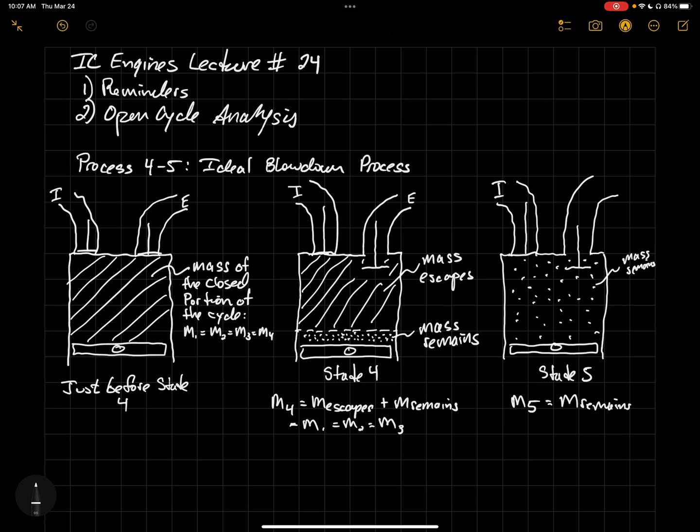So all of these irreversibilities essentially cause entropy generation, and we're doing an ideal cycle analysis, and we know that entropy generation is not an ideal thing, right? We don't want to generate entropy; that is an indication of inefficiency within the process. And so we define this as an ideal blowdown process, but we also recognize that there's a tremendous amount of entropy being generated during this blowdown process by virtue of the mass that's escaping being initially at a high pressure. It's at the pressure of state 4, and then it lowers its pressure to, say, atmospheric pressure, right?

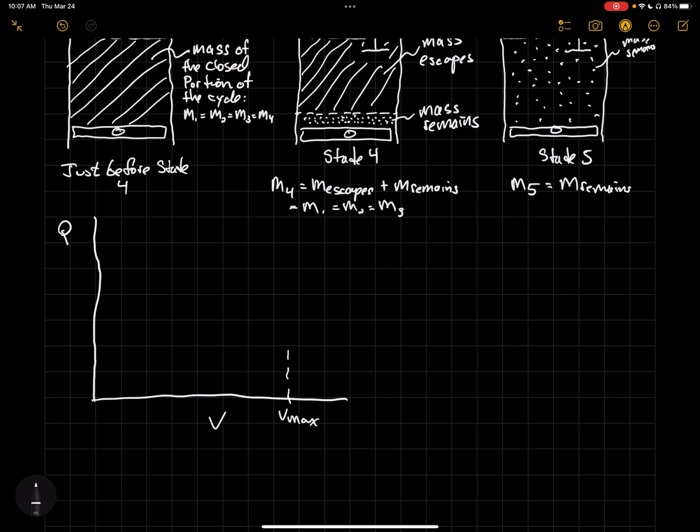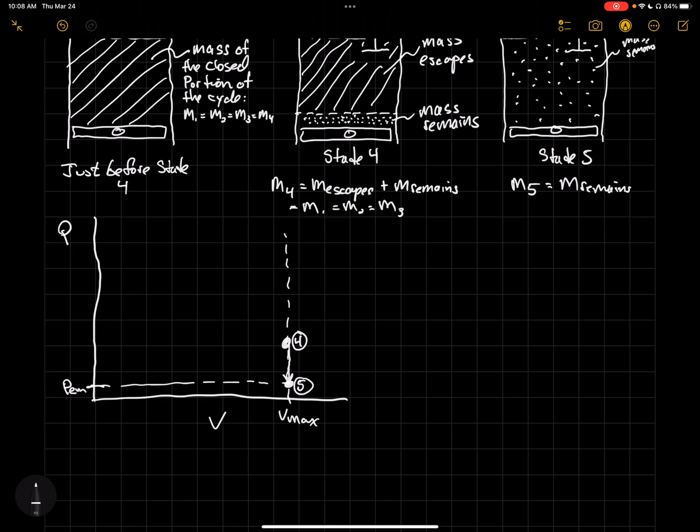So just to highlight that, we can draw on our PV diagram. We're basically here at that maximum volume. Piston is at bottom dead center, and our system is at state 4, which is at some elevated pressure P4, and we're essentially blowing down by allowing the mass to escape the cylinder to some exhaust pressure, some pressure of the exhaust manifold. And so that pressure drop from state 4 to state 5 occurs because mass is escaping the cylinder. So you have less mass in the cylinder, same volume.

And so consequently, the pressure lowers as the mass that remains fills that expanded volume. So the question is, if the mass that escapes is essentially a throttling process, we go from high pressure to low pressure without extracting any useful work out of it, right? That's an irreversibility. Then how can we model the blowdown process to be ideal? Well, this is where we have to recognize that our system is open, and we're no longer doing what is called a control mass analysis, but we now switch to doing a control volume analysis, okay?

So what do I mean by that? Well, just before state 4, if you look at the figure on the left, this mass that's in the cylinder is a combination of the mass that will eventually escape and the mass that remains. And it's the same mass that we had at state 3, at state 4, at state 2, as was at state 1. In other words, there was a series of processes where the mass didn't change because it was a closed system. And if you remember way back when we first talked about thermodynamic systems, we said that if we have a closed system, we can treat the mass of that system as our control mass. In other words, that is the mass that we're doing the analysis on, okay?

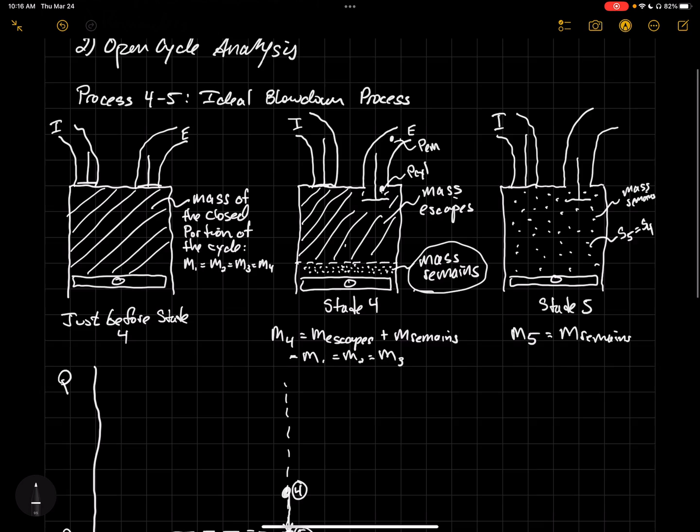But of course, as that mass is escaping, just to beat a dead horse, the mass that escapes has a higher entropy because it's generated entropy as it's undergone this throttling process, this unrestrained expansion past the exhaust valve, okay? So what that means, looking at our PV diagram, is that at state 4 we have an entropy at state 4. And then finally at state 5, we also have an entropy at state 5, and this is equal to the entropy at state 4, okay?

And so essentially, if we draw this on, say, a TS diagram, then our TS diagram would more or less look something as follows, where we have our state 1, where we have relatively low temperature, low entropy. Oops, this is entropy, excuse me. Let me correct my subscripts here. So this is a TS diagram.

We have state 1, and of course, process 1 to 2 is an isentropic process where we increase our temperature during compression, but we do so isentropically, so the entropy stays constant. We then have some type of heat addition process, and so our entropy increases as a result of that heat addition process, and our temperature also increases, and so this brings us to state 3. And then we have our isentropic expansion process where we have work extraction, and during that work extraction, we also lower the temperature, and we do so isentropically, so the entropy at state 4 is the same as the entropy at state 3.

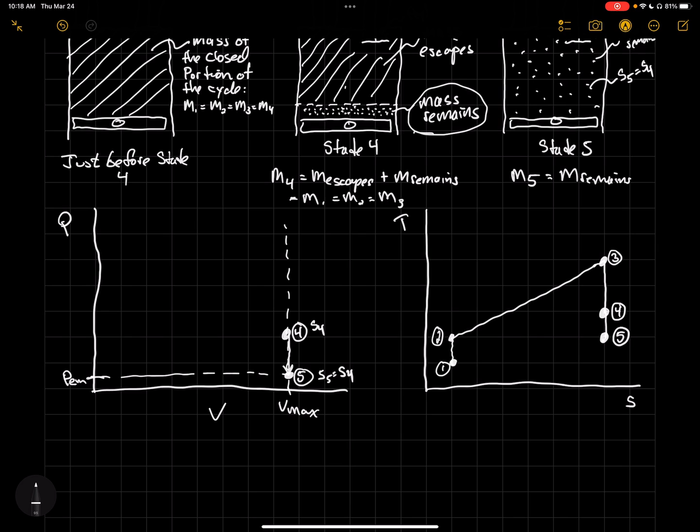And then finally, we have our isentropic blowdown process where we now have the entropy at state 5 to be the same as the entropy at state 4, okay? So this process 4 to 5, this ideal blowdown process, is essentially an isentropic expansion process, a continuation of the expansion process of the mass that remains, okay?

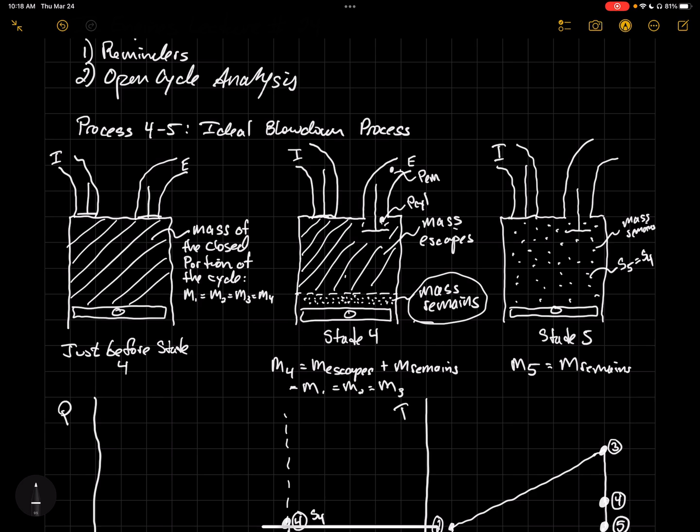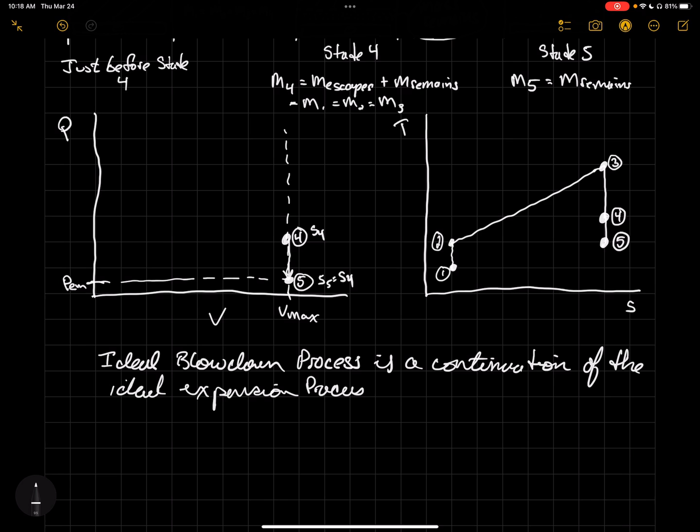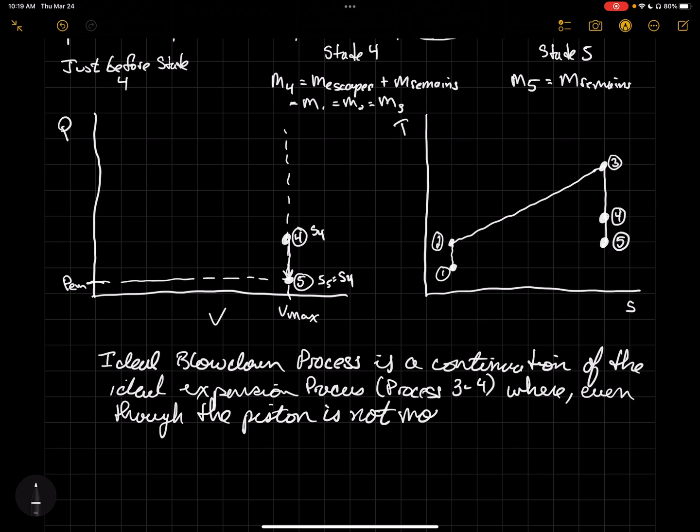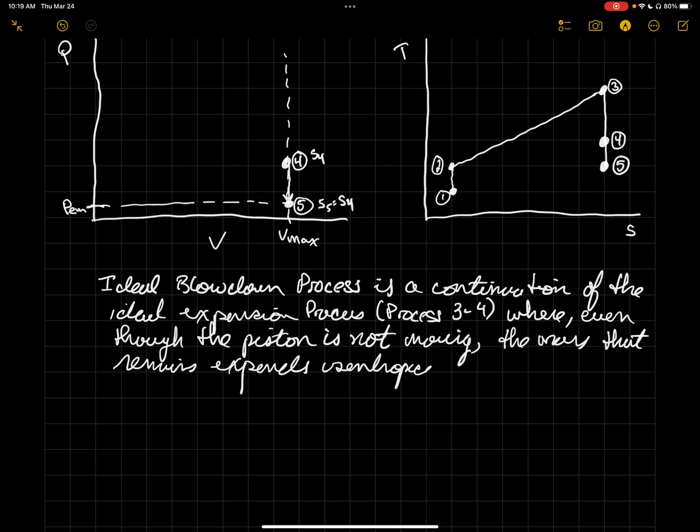So let me just go ahead and say that. The ideal blowdown process is a continuation of the ideal expansion process that is process 3 to 4, where even though the piston is not moving, the mass that remains expands isentropically to fill the whole cylinder volume as the mass that escapes leaves the cylinder. Okay?

So very often we fix state 5 by saying that the pressure at state 5 is the same as the pressure of the exhaust manifold, and the entropy at state 5 is the same as the entropy at state 4, okay?

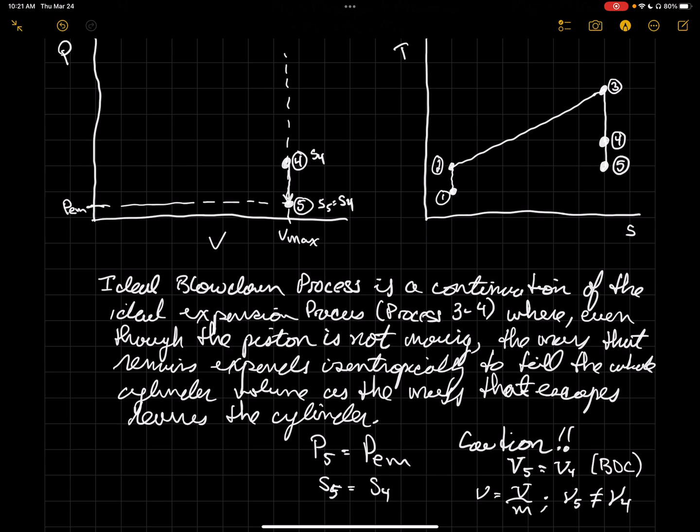Now, one thing I want to caution you on, and this is a common mistake, is that the total volume at state 5 is the same as the total volume at state 4, right? In other words, the piston is at bottom dead center. We're at maximum volume. But if you recall, specific volume, which is the total volume divided by the mass, is not the same at state 5 as it is at state 4. Okay, so specific volume at state 5 is not equal to the specific volume at state 4, precisely because the mass at state 5 is not equal to the mass at state 4, right?

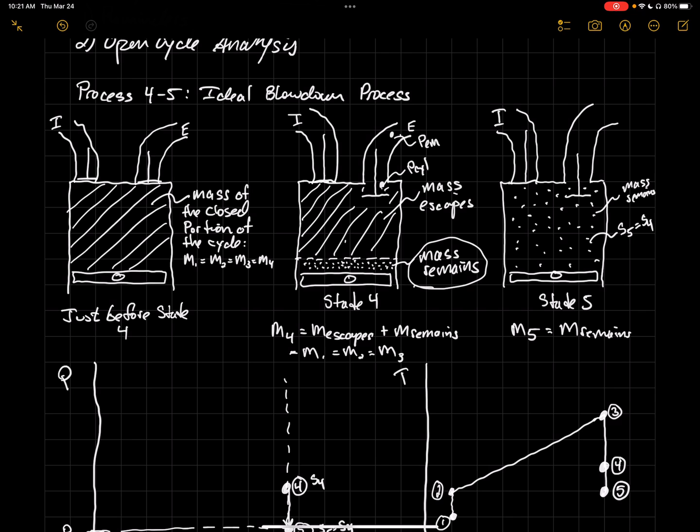If we go back up here and look, we can see that the mass at state 4 is the same as the mass of the closed portion of the cycle. It's a combination of the mass that escapes plus the mass that remains, whereas the mass at state 5 is just the mass that remains, okay? And so we do just need to be careful about that, recognizing that the specific volume at 5 is not the same as the specific volume at state 4.

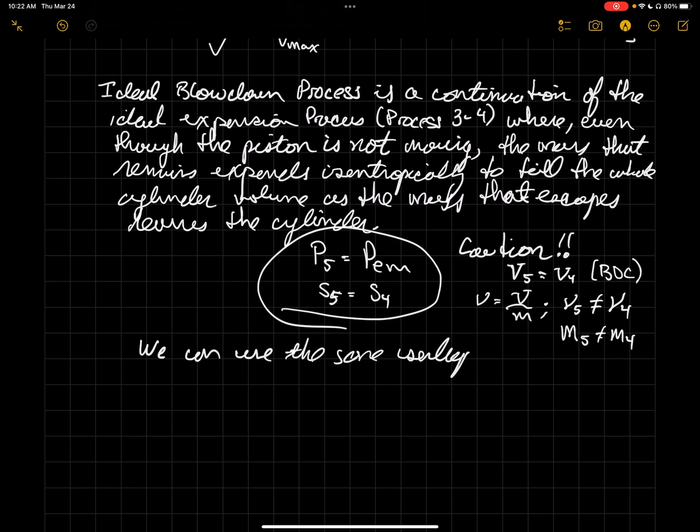Okay, but because this is an isentropic process, we can use the same isentropic relationships that we developed for process 1 to 2, the isentropic compression process, and process 3 to 4, the isentropic expansion process, right? And so we can use the same isentropic relationships for process 4 to 5 that we use for other isentropic relationships.

So we can say, for example, that T2 over T1 is equal to V1, excuse me, just fix that real quick. There we go. I need to fix the whole thing.

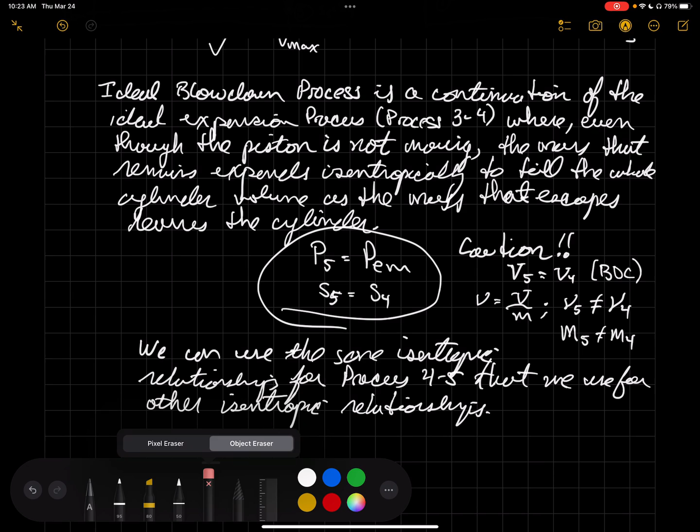So we can say T5 over T4 is the same as V4 over V5 raised to the gamma minus 1.

And we can say P5 over P4 is equal to V4 over V5 raised to the gamma minus 1, raised to the gamma.

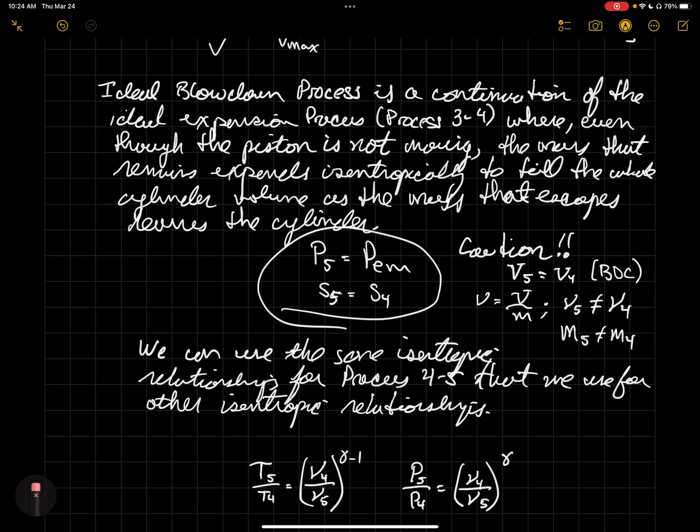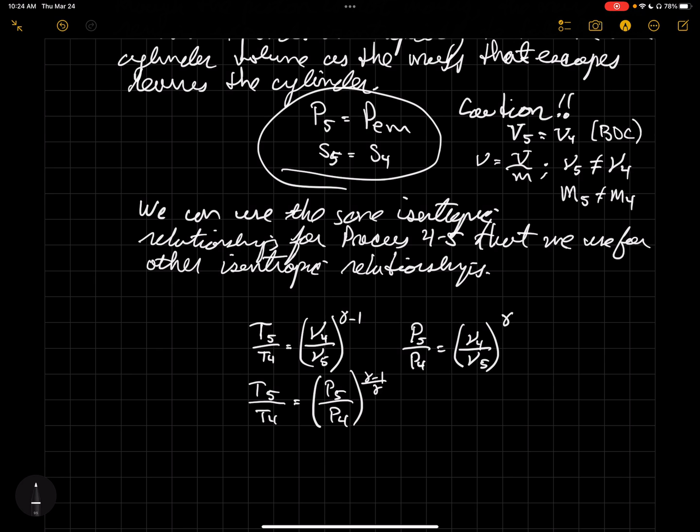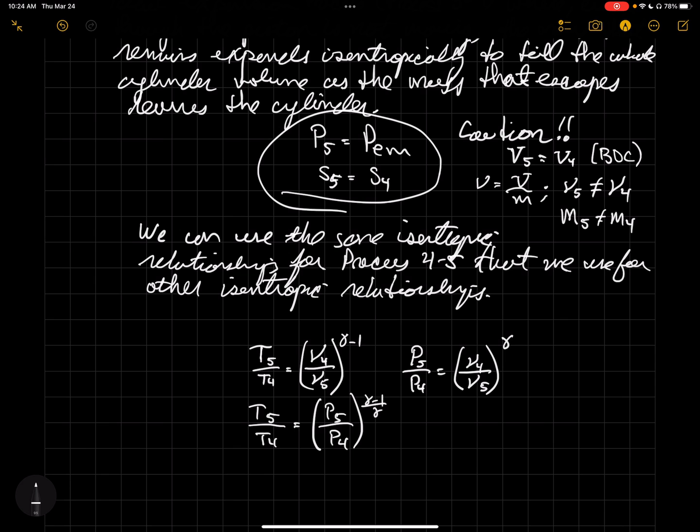And then finally, we can say T5 over T4 is equal to P5 over P4 raised to the gamma minus 1 all over gamma, okay? So these relationships are of course true for any ideal gas undergoing an isentropic relationship where we assume that the ratio of specific heats are remaining constant during that process.

Real quick, just as a quick aside, before we move on and analyze our next process, process 5 to 6, there have been some questions about the relationship between a polytropic process and an isentropic process, right? So just as a quick sidebar, just recall that an isentropic process

of an ideal gas, under assuming constant specific heats, that is, gamma is constant during the process.

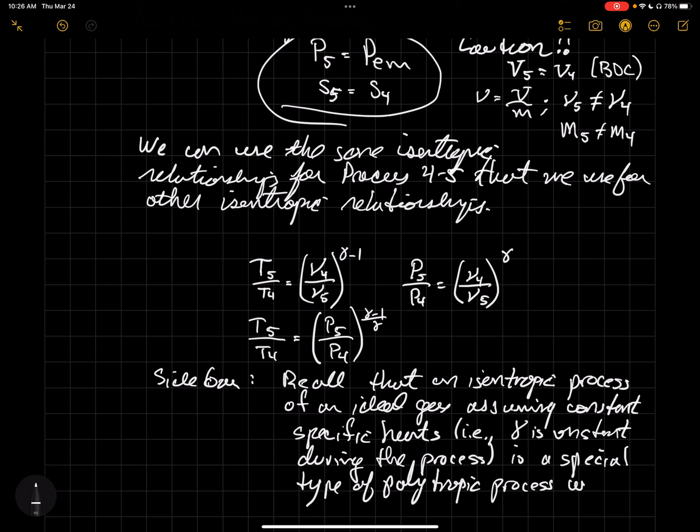So this isentropic process of an ideal gas, assuming constant specific heats, is a special type of polytropic process where N is equal to gamma, okay?

So remember that a polytropic process is PV to the N equals a constant, which is to say P1 V1 to the N equals P2 V2 to the N.

And so if we just manipulate this to say P2 over P1 is equal to V1 over V2 raised to the N, well, that's exactly what we have written up here, right? P5 over P4, it'd be, say P2 over P1 is equal to V4 over V5 or V1 over V2 raised to gamma, right? It's the same, it's of the same form, right?

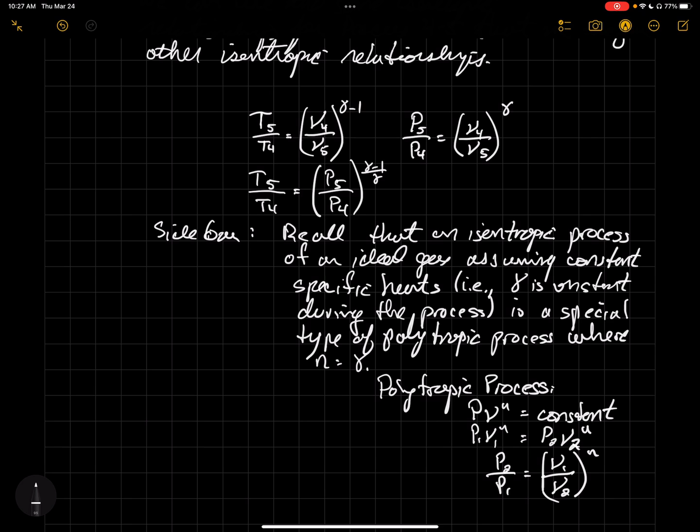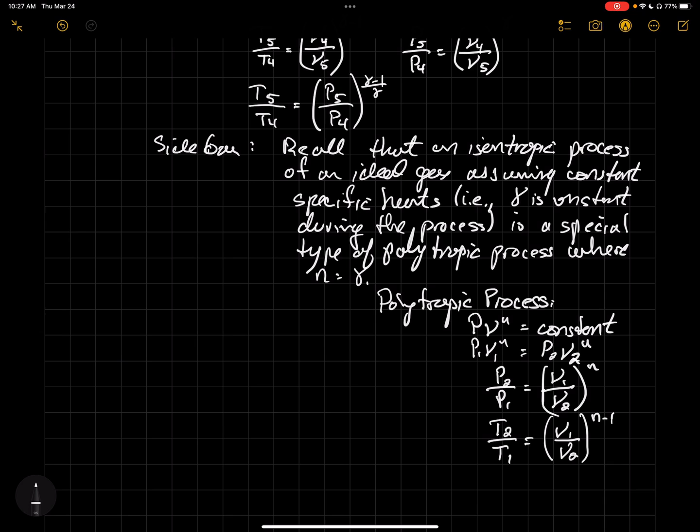So these other relationships that you see here, T5 over T4 equals V4 over V5 to the gamma minus 1, well, you can use those same relationships if it's a non-isentropic polytropic process, right? So in other words, we can likewise say T2 over T1 is equal to V1 over V2 raised to the N minus 1. That's a true statement for a polytropic process of an ideal gas.

And likewise, T2 over T1 is equal to P2 over P1 raised to the N minus 1 all over N, okay?

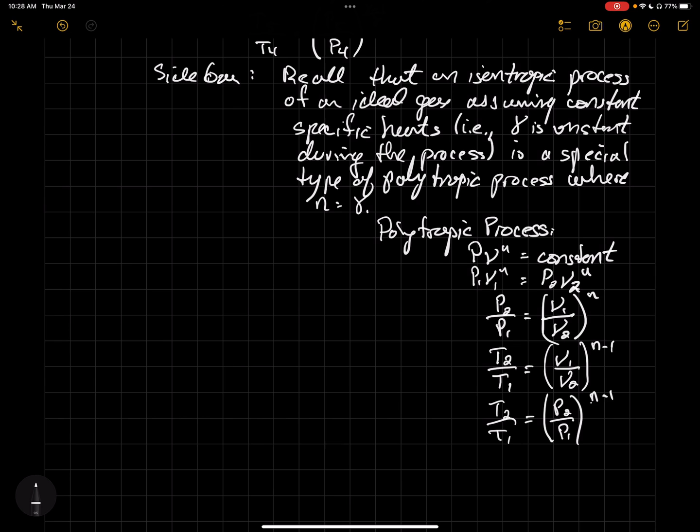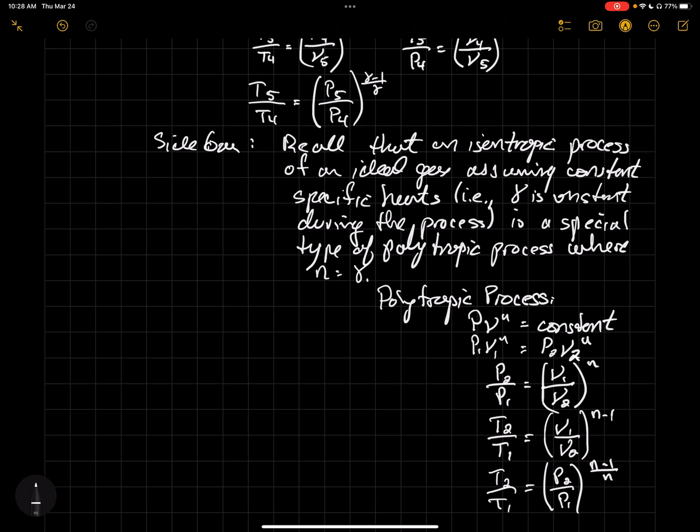Okay, so I didn't explicitly highlight this. For those of you that watched the thermodynamics review lecture, I didn't explicitly highlight this in that review because this is only true for an ideal gas, okay? And I didn't want to make such a bold statement in the thermodynamics review in case it were to get used for a non-ideal gas situation, okay?

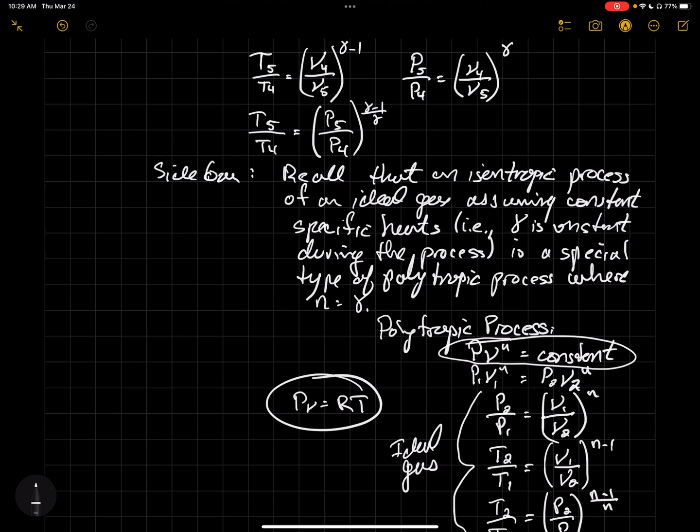But because this is an ideal gas and the ideal gas relationship of PV equals RT, right? It's this relationship that's causing these other relationships in terms of T with respect to volume and T with respect to pressure. The fundamental definition of the polytropic process is this one here, PV to the N is equal to a constant. Every polytropic process is defined as PV to the N equals a constant. But the moment that you allow your substance to be an ideal gas, now you can make these relationships between temperature and volume and temperature and pressure, okay? And that's where the ideal gas behavior comes in.

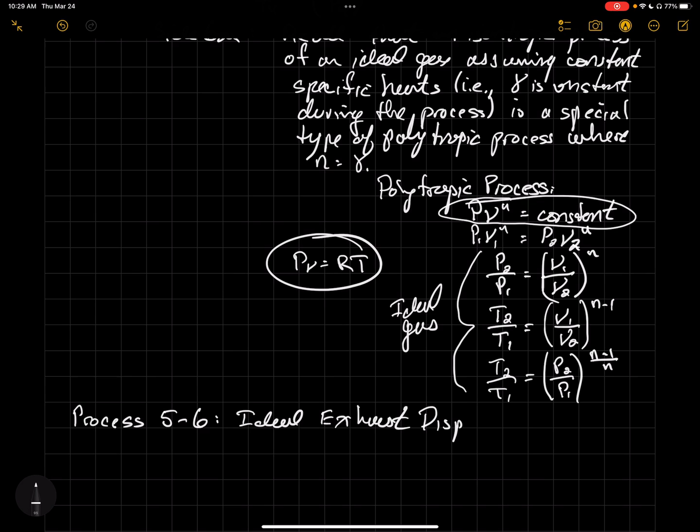Okay, so let's move on then, and now move on to the next process, which is process 5 to 6. And so process 5 to 6, if you remember, is our ideal exhaust displacement process. And so essentially what's happening with the ideal exhaust displacement process is, of course, at state 5,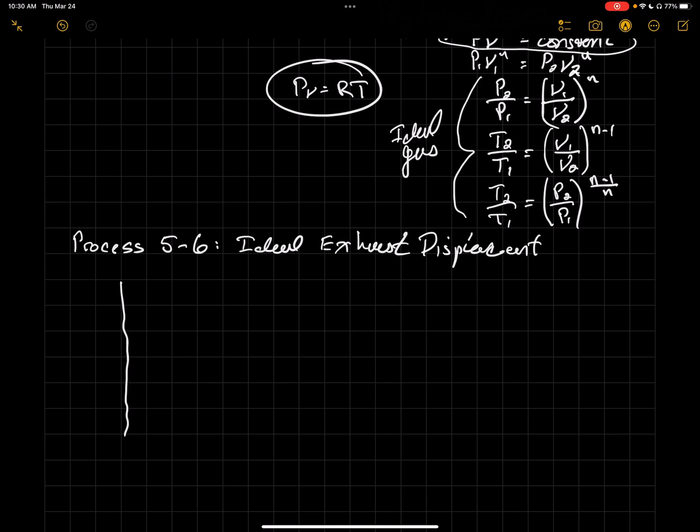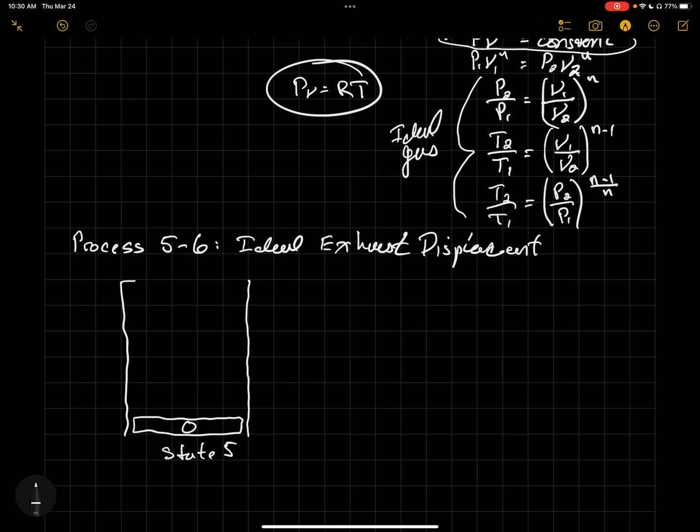so say, for example, this is our state 5. And this is our intake valve and our exhaust valves, right? Exhaust valve is still open. So this is our exhaust port, and intake valve is of course closed.

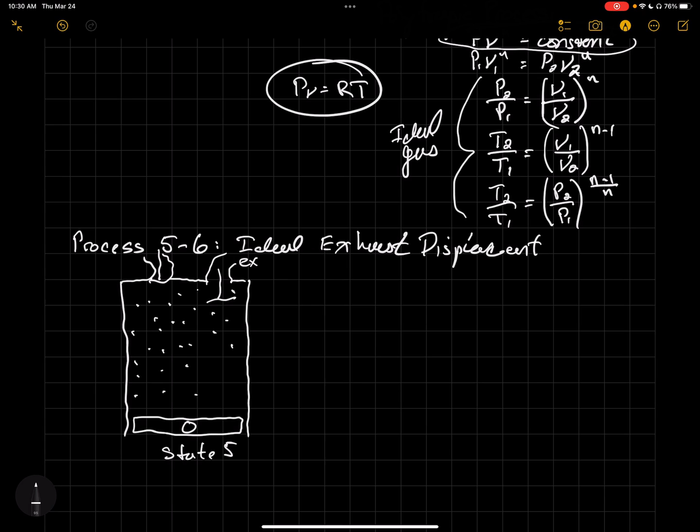And we have the mass that remains after the blowdown process that has now isentropically expanded to fill the whole cylinder volume. Well, now what happens in process 5 to 6, is the piston moves from bottom dead center to top dead center with the exhaust valve open, pushing the remaining mass out the control volume, out the cylinder.

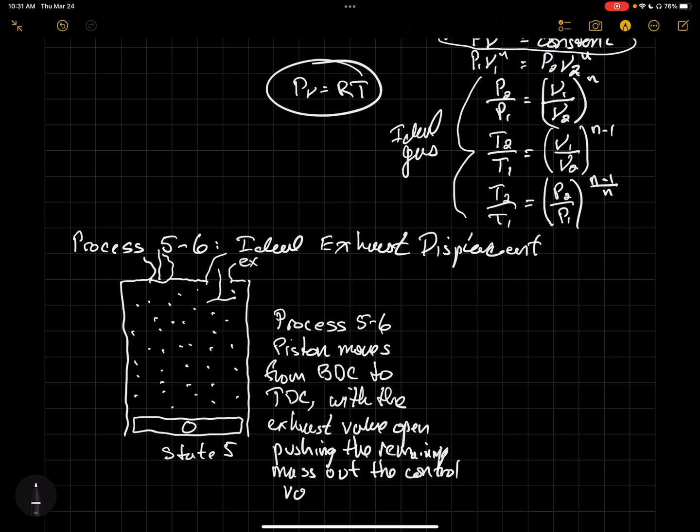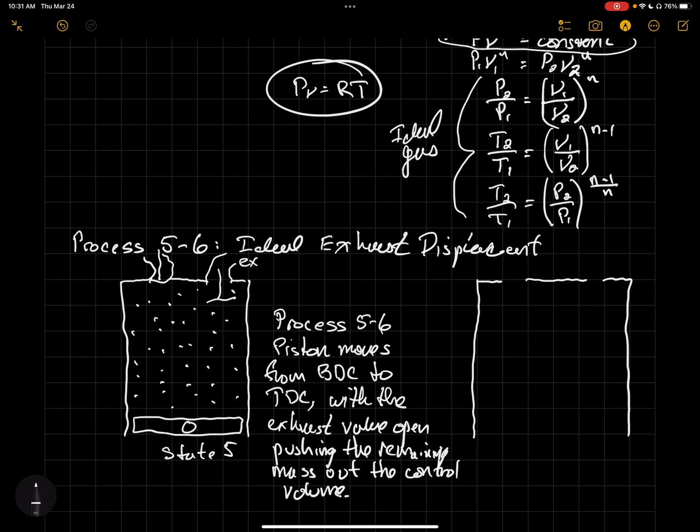Okay, and so at state 6, we now have, again, our intake valve is still closed, our exhaust valve is open, and now our piston is at top dead center. So this is state 6.

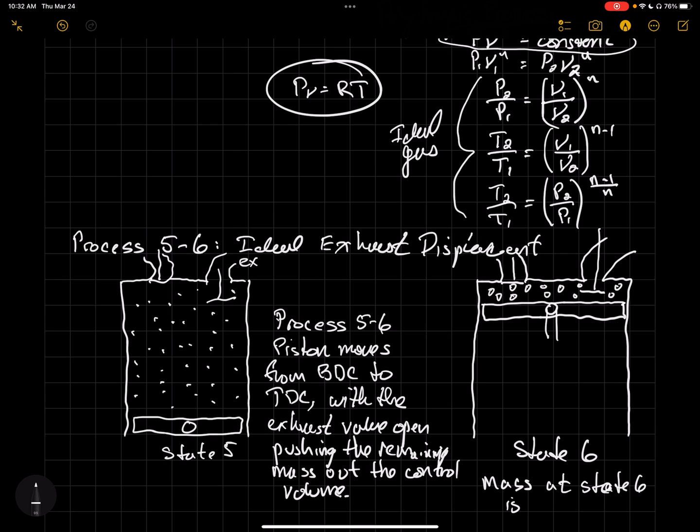And then we have a different mass that now remains at the end of the exhaust displacement process. And that will be what we define as our residual mass, okay? And so the mass at state 6 is our residual mass.

Okay, so we can go ahead and define at this present moment that mass at state 6 is the residual mass. We're going to come back to that residual mass in just a little bit, because that's going to define for us what we call the residual fraction, but we'll do that at the very end after we've described these other processes.

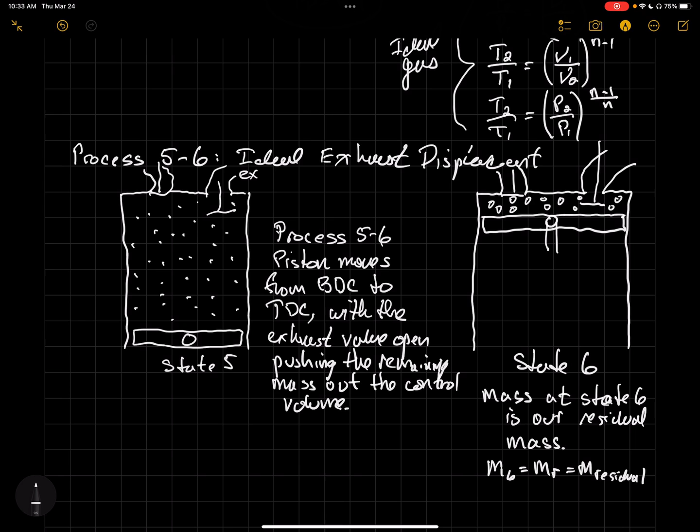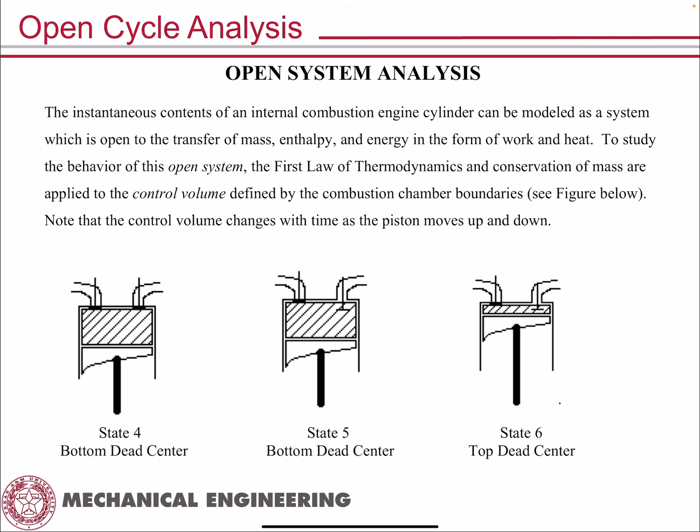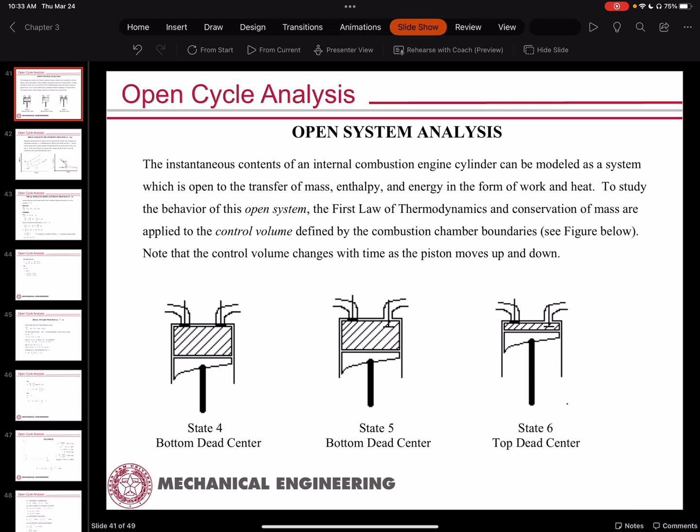And mass, this m sub r, is mass residual as opposed to mass that remains. So I'm defining the mass that remains to be this mass at state 5, prior to the ideal exhaust displacement process. Now your notes actually go through and describe for you all of these different processes. Okay, just one moment here, sorry. There we go.

So there's the ideal exhaust displacement process, right? And you can see here, for example, where this is the mass that remains, undergoing this continued expansion, this isentropic expansion process, to the thermodynamic state 5, as opposed to what is being called state 5A, which is the state.

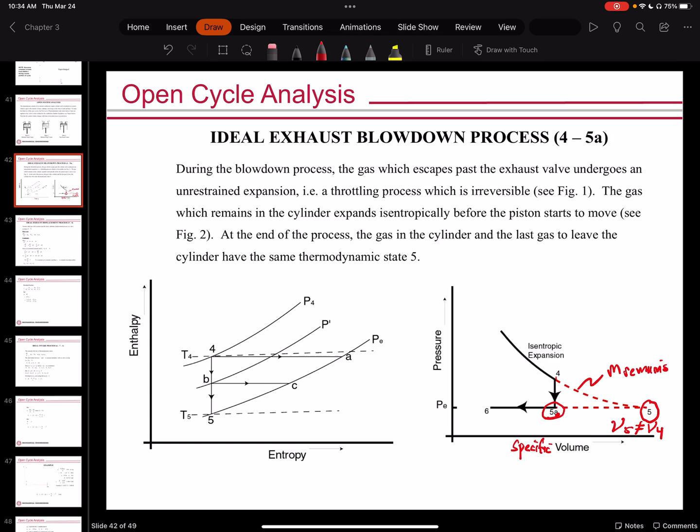State 5, the thermodynamic state 5 that is at the same total volume that is at state 4. And so this additional expansion that you see out to state 5 here, really to be precise, this is defining for us the specific volume. And so now, of course, you can see how the specific volume at state 5 is not equal to the specific volume at state 4.

Okay, and then we have the ideal exhaust displacement process, and you can see that there's quite a bit of mostly algebraic manipulation of the first law of thermodynamics in order for us to analyze the process 5 to 6, the ideal exhaust displacement process.

I apologize, for some reason this isn't showing the different operators here, but this is, of course, dE CV by dt is equal to Q CV minus the work plus the energy flow in minus the energy flow out. Your notes should reflect all the correct operators. It's just not showing up on my iPad. I apologize for that, but you can essentially go through this manipulation if you'd like.

The one sort of algebraic trick that's being used here is that there's a point where we add m Cp T to both sides of the equation, and that then allows us to combine terms at different states.

And so ultimately we end up getting—or excuse me, I'm off by a process. This is not correct, this is for the ideal intake process, not the ideal exhaust displacement process. So anyway, you can go through this if you'd like, and ultimately the end result is that what is shown is that m Cp dT by dt is equal to 0. This is the result from the first law analysis.

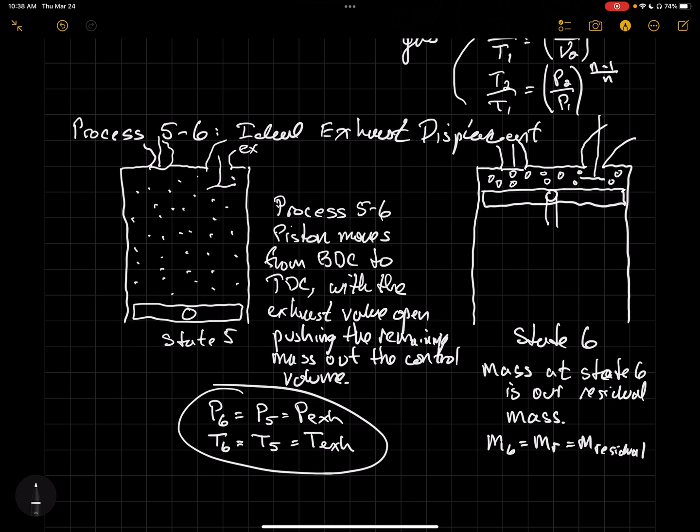Okay, so now let's go ahead and do our last two processes. And if you remember when we discussed this in lecture on Monday, I separated these as two distinctly different processes.

I said there was a process 6 to 7, which was the intake reversal, or the valve reversal process. In other words, our exhaust valve closes and our intake valve opens. And then I said there was the ideal intake process. Process 7 to 1 is our ideal intake process. But the reality is that there's no reason for us to separately define state 7.

In other words, this state after the valves change positions, right? After the exhaust valve closes and the intake valve opens, there's really no need for us to necessarily know what's going on at that state 7, okay? And so we can actually combine that state into our process analysis and analyze what we would say process 6, 7, and 1, okay? And so that's what we're essentially going to do, and that's exactly what we do in the lecture notes, is we combine the process 6 to 7 with the process 7 to 1, and basically call it process 6, 7, 1, okay?

Okay, so before we can do that, though, we need to go back and resolve this discussion that we started on Monday, but never really finished, in the context of the three different types of intake processes that we can have. Okay, so let me just real quickly go back to my notes and just kind of close that discussion. So if we go to slide 39, for example, you can see here where we have the three cases described. We have the unthrottled case, we have the throttled case, and then we have the supercharged case, or what I referred to as boosted case on Monday, okay?

And so what is first shown in the diagram here, this first diagram, is the unthrottled case. And basically what you can see for the unthrottled case is that the intake pressure and the exhaust pressure are the same. And so the pressure at state 5, which is of course the same as the pressure at state 6, okay, is also the same as the pressure at state 7, which is the same as the pressure at state 1. Okay, the intake process, we haven't gotten to it yet, but process 7 to 1, the ideal intake process, is also going to be a constant pressure process.

Okay, so if our situation is unthrottled, where intake pressure is equal to exhaust pressure, then in terms of how it looks on a diagram, it's not too terribly exciting because we have pressure at state 5, it goes to pressure at state 6, which is the same. We close our exhaust valve, open our intake valve. Now we're at state 7, and then state 7 is a constant pressure intake process, but it's at the same pressure as the exhaust process, and so that then brings us back to state 1, okay?

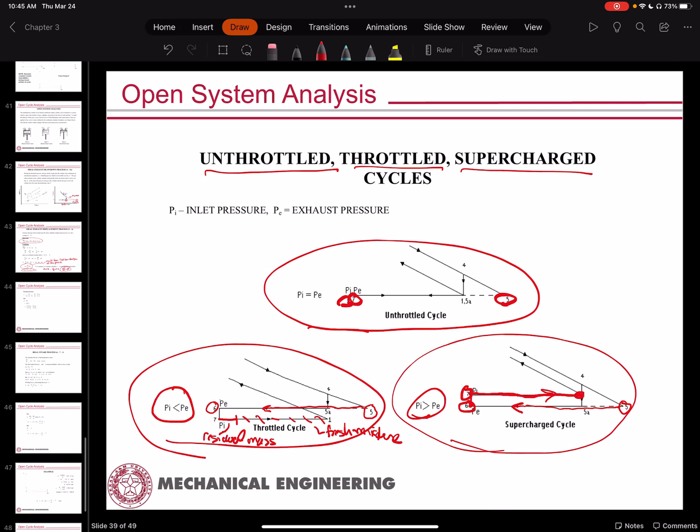What we do is we basically lump these 3 states together into a single process where we close the exhaust valve, open the intake valve, and then have the ideal constant pressure intake process from state 6, 7 to 1, okay? So that's our ideal intake process, and similar to when we were analyzing the ideal exhaust displacement process, we can do a first law analysis of this, our general open first law equation. And I apologize, I don't know why my operators aren't appearing here, but this equation will reflect correctly in your notes. This is dE by dt is equal to QCV minus the work transfer, work of the control volume, plus energy that flows in with mass minus the energy that flows out with mass. Okay, now it's on this slide.

I started to mention this on the exhaust displacement process and I got too far ahead of myself. But it's on this slide where what we do is we add an MCP-T term to each side of the equation. And that allows us to create a difference of MCP delta T, okay? And so by creating that MCP delta T, we're basically able to algebraically manipulate our first law equation, right? So this is MCP T1 is equal to M6 CP T6 plus this PI minus PE times the volume at state 6 plus mass at state 1 minus the mass at state 6 times CP Ti, okay? So what we're essentially doing is adding M6 CP T6 to both sides of the equation, right?

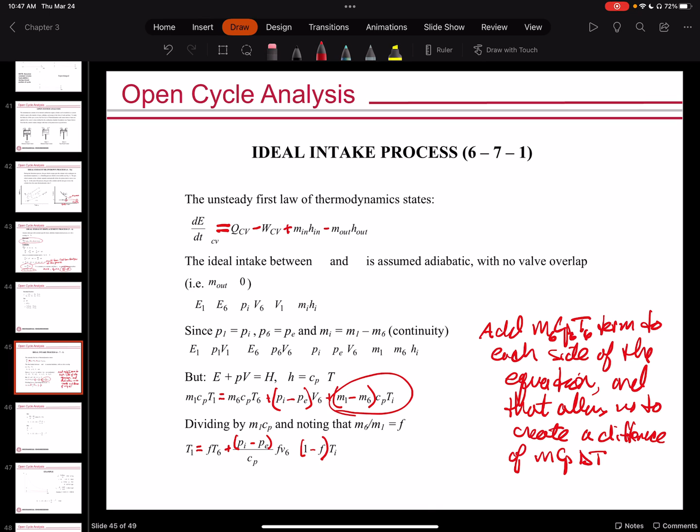And so that then creates an opportunity for us to have this differencing scheme in there that ultimately allows us to algebraically manipulate an expression that finally gives us a relationship that says T1 is equal to the residual fraction, which we haven't defined yet. We'll do that in just a moment, plus PI minus PE divided by CP times the residual fraction times the specific volume at state 6 plus 1 minus the residual fraction times TI, okay, where TI is the intake temperature, okay? And so we can carry this a little bit further and do a little bit more algebraic manipulation. I won't go through all of this in great detail, but the end result that we want to get to is this bottom equation, which says that T1 is equal to 1 minus the residual fraction times Ti plus the residual fraction times Te, the exhaust temperature, times 1 minus pi over pe to the power gamma minus 1 all over gamma, okay? And so this is our ultimate final equation.

And let me just define some of these terms here. First of all, Ti is the intake temperature, which is the same as the fresh mixture inducted during the intake process, okay? And note well that Ti is not the same as T1, okay? T1 is the temperature of the mixture, and I'm going to say the temperature of the trapped mixture because this is after the intake process and the intake valve is closed. So it's the temperature of the trapped mixture, where the trapped mixture is fresh mixture, that which came in, that which was inducted during the intake process, the mixture that would have been in the intake manifold, plus the residual mass. And again, we haven't defined that residual fraction yet, but we will here real soon. Okay? And then finally, TE is the exhaust temperature.

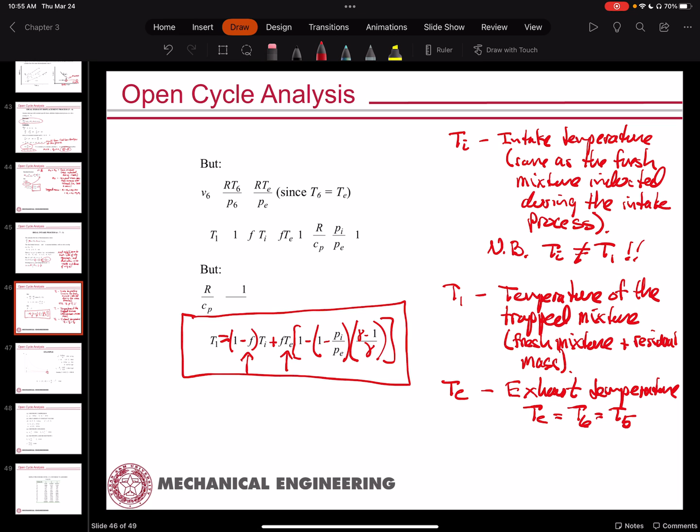And of course, residual fraction, if we go back to the construction that we just made, residual fraction is a function of T4 and P4. So prior to starting our analysis, we need to have information about state 4 before we can determine our temperature at state 1. And so we aren't able to explicitly determine state 1 at the start of our open cycle analysis. And so, well, what do?

Well, of course, you've all had, at this point in your educational careers, something like a numerical analysis course, and you know that in such a case, if you have to know something about what you're about to analyze before you can start the analysis, then what you do is you make a guess, right? So the first thing you do is make a guess on the unknown values, and then iterate the solution.

And so you would make a guess as to what your exhaust temperature is. You would make a guess as to what your residual fraction is. Use those guessed values in the equation for your T1 and come up with an initial guessed T1, and use that T1 to conduct your analysis until you get state information at state 4. And then once you have your state information at state 4, you can then iterate and plug those new values into your T1 equation and come up with a new T1, calculate again, right, and continue to iterate until you eventually reach a convergence of a solution.

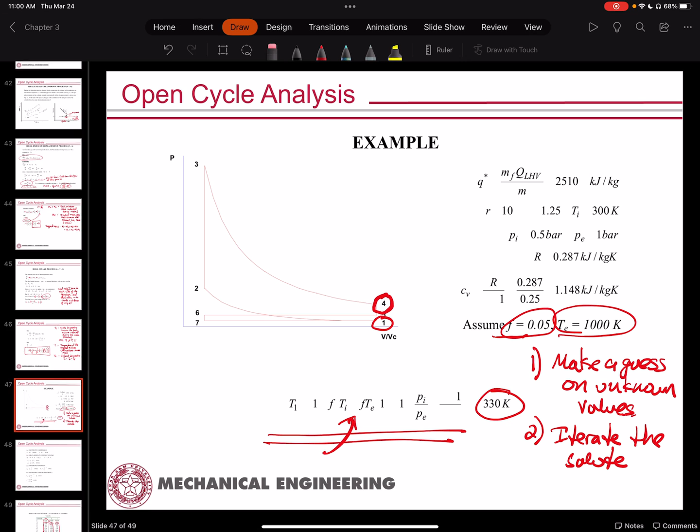And so what you're doing for lab number 2 is your software is actually doing this iteration for you every single time you change compression ratio and you change the cycle type, right? As you go from constant volume to constant pressure to the 2 different limited pressure cycles, okay? So you're not asked to do that, obviously. The software does it for you, but keep that in mind when you write your analysis for lab number 2 so that you understand now how that software is calculating these various parameters, what they're doing in those calculations.

Okay, thank you very much for your attention. Sorry the video ran a little bit late, but I wanted to get to a good stopping point before your homework is due tomorrow and before your exam on Monday.